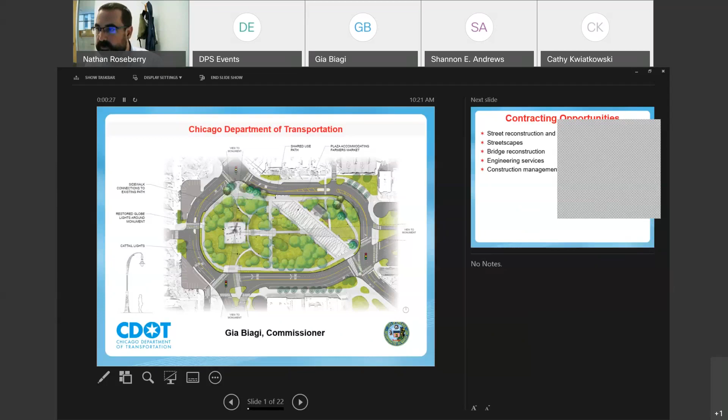Nathan, I'm personally impressed, so you're good to go. We are, this is our first virtual experience, and so we are more than welcome because we know you've got some good stuff to talk about.

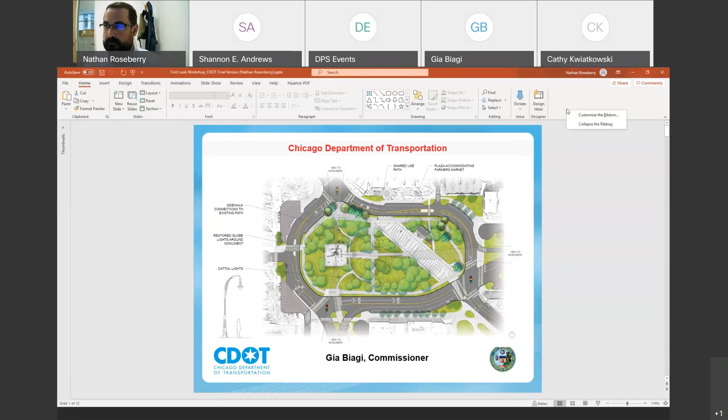Okay, great. Well, thank you all very much for having me here today and for your patience as we got up and going. As the commissioner mentioned, we have a lot of great work coming up in the near term, and you're going to see even more work coming in the coming years with our initiatives to really focus in on those state of good repair improvements, but also making sure we're thinking about all modes of travel, people who bike, walk, take transit, and drive, thinking about safety and supporting the local economy.

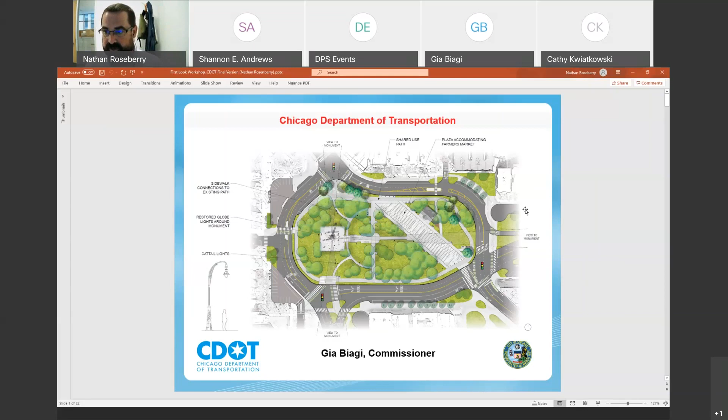I have this slide on the front to really highlight that. This is the improvements we're looking at on Milwaukee Avenue, focusing on the Logan Square improvements, where we're actually looking to reconfigure the intersection. We were going to rebuild it, but we didn't want to rebuild it exactly the same way. We saw opportunities to improve connectivity and activate the space, providing more space for people to enjoy while making sure they have opportunities to get around.

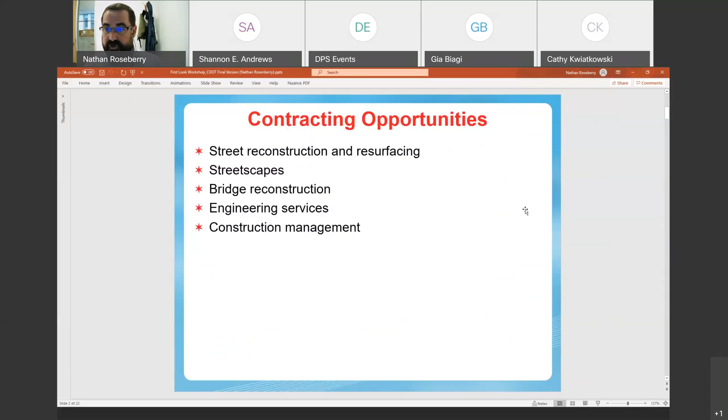So today I'm going to walk you through contracting opportunities by different categories. We'll walk through street reconstruction and resurfacing projects first. Next, we'll walk into those streetscapes the commissioner mentioned, looking to revitalize different corridors. We'll go into bridge reconstruction and rehabilitation, and then we'll finish off with engineering services and construction management opportunities, really the professional service end of the opportunities.

So the first category is street reconstruction and resurfacing. The first project I wanted to highlight: CDOT is supporting a lot of the improvements you'll see in Jackson Park for the Obama Presidential Center. I'm happy to report we have finalized the federal review and will be moving into construction later this year. We anticipate bidding the project second quarter and starting construction in third quarter for our first bid set, which will include the roadways on Lakeshore Drive from Hayes to 57th, Hayes Drive from Stony Island to Lakeshore, Stony Island from 64th to 59th, and a small section of Midway Plaisance from Stony Island to Cornell.

These improvements will include widening roadways, reconfiguring roadways, new landscaping, new pedestrian underpasses - three of them - widening existing bridges, and a lot of traffic signal work. We'll be modernizing or installing new signals; I think there'll be three new traffic signals with this contract.

And these improvements will allow for more and better connected park space in Jackson Park, really trying to make sure we're providing that recreational opportunity and allowing for the construction of the Obama Presidential Center that'll be running in parallel.

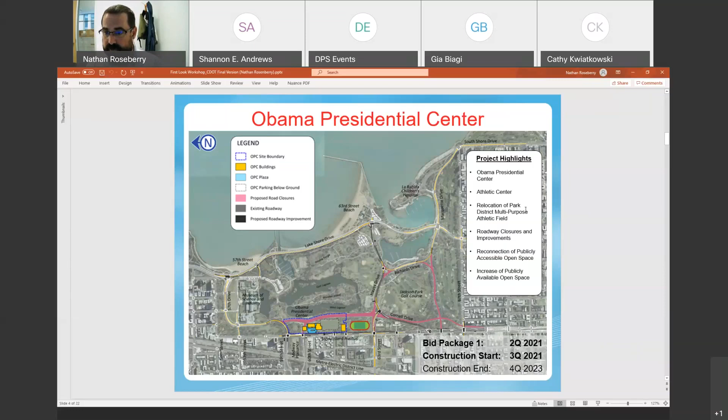Next project I wanted to highlight is our arterial resurfacing contracts. We anticipate releasing our 2021 Fed-funded series of arterial resurfacing projects. This will be 4 different contracts.

They are geographically based. There's a north, a central, a south, and a far south contract. Totals of 41.15 miles, about 10 miles per contract.

With this work, you'll see it's predominantly asphalt based, so it's milling and resurfacing the roadways. We do make sure to make everything ADA compliant, so you'll see concrete work, especially at the corners.

And you'll also see those complete streets and safety improvements. So you'll see modifications including curb extensions, refuge islands, bike lanes, and new pavement markings.

We anticipate this being bid in second quarter, with construction starting in third quarter, and really looking to focus to try to finalize construction this year.

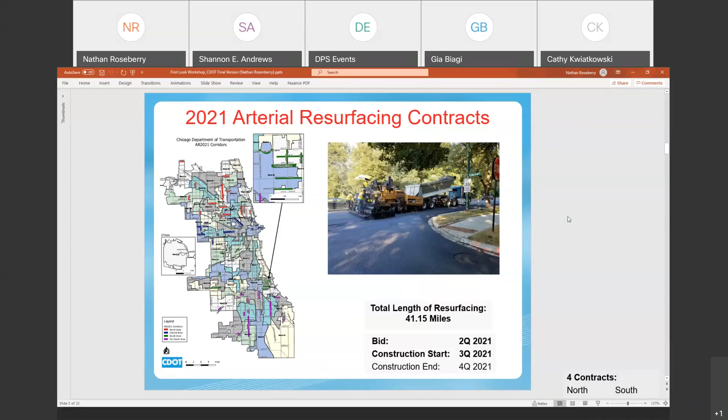The next project was the one I showed on the first page, the Milwaukee Avenue project. This is Milwaukee Avenue, Logan to Belmont.

It's a full right-of-way project, so we will be rebuilding the entire right-of-way, sidewalk, roadways, and the like.

It's the 5th section. We've been working our way south from northwest to southeast on Milwaukee. Most recent reconstruction was Addison to Belmont, so this will pick up there and move southeast from Belmont down to Logan.

So it will include sidewalk work, curb and gutter, roadway resurfacing and reconstruction, street lighting, landscaping, traffic signal modernizations, and new traffic signals. It'll also include a lot of plaza work.

So we'll be focusing in on the 2 plazas internal to the Logan Square intersection and the Kedzie Plaza to improve those areas and activate those spaces.

This one does include federal and local funds. We anticipate bidding it third quarter this year, starting construction by the end of the year, and construction lasting approximately 2 construction seasons.

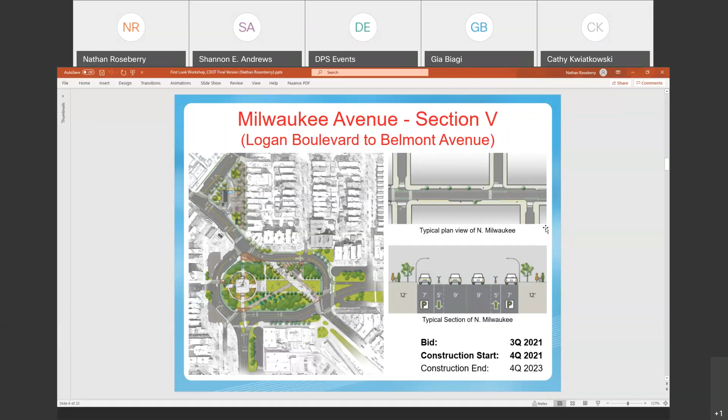The next section is Lake, Ashland to Halsted. This is another roadway reconstruction project. We are looking to lower Lake Street from Ashland to Ogden.

We've been working on Lake Street west of here, lowering the roadway to improve that vertical clearance for the larger vehicles that need to get through. That last stretch at Ashland and Ogden will provide access to larger vehicles to get to the interstates via Ashland or Ogden.

While we're doing that, though, we're also looking at all modes, and there'll be a focus on the pedestrian realm. So really that sidewalk space, providing a consistent design throughout, street lighting and furniture and design in that sidewalk space, really looking at their safety and comfort.

So you'll see curb extensions and widened sidewalks and the like. There's also a proposal for bike accommodation.

There's existing bike facilities to the west, and so extending those further east to get to the bike corridor on Halsted.

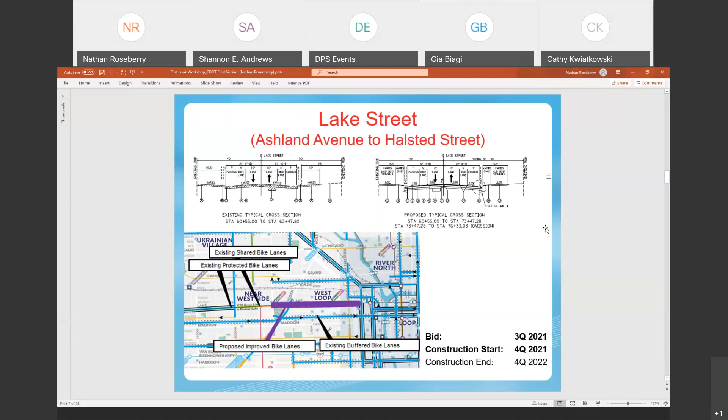This is a locally funded project, so we utilize TIF funds. We anticipate bidding at third quarter 2021, construction starting fourth quarter 2021, with construction wrapping up fourth quarter 2022. So about a year's worth of construction.

The next reconstruction project is Grand Avenue, Damen to Ogden. We just bid the project to the west of here, Chicago to Damen, so that construction will be starting this year. So this is continuing our roadway improvements on Grand, moving from west to east.

This will be a locally funded construction project. It'll be right-of-way to right-of-way.

So we'll be rebuilding the sidewalk, curb and gutter, and the roadway, installing new lighting, new trees, modernizing 3 traffic signals, and then looking at pedestrian level safety improvements at intersections, so curb extensions and raised crosswalks.

We anticipate this project being bid third quarter, starting construction by the end of the year, and taking approximately 1 construction season to complete.

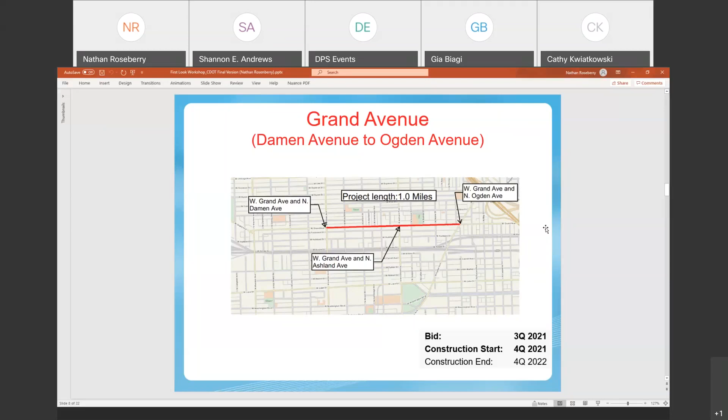The next group of projects are streetscape projects. First project is 71st Street. This is the second section of the project. It's a continuation of previous work in the area on Jeffrey.

This will be improvements between the right-of-way and building face that were previously completed. Those improvements included new lighting, new sidewalk, curb and gutter, light pole, community identifier signs, site furnishing, pavers, and trees. This second phase will be focused more on the roadway.

So there will be full width roadway resurfacing and pavement markings. It'll include new bike lanes along 71st, creating a bike connection between Jeffrey and the Lakefront Trail. There'll also be pedestrian crossing improvements at Metra tracks, enhanced crosswalks and ADA ramps.

There'll be a travel lane reduction to reduce speeds and crashes, taking it down to a consistent cross-section of a single lane. And then architectural fencing across the Metra tracks, really to help improve safety with those interactions with the trains.

This is a very unique street where we have at-grade trains in the center of the roadway.

This includes federal and local funds. We anticipate bidding this project second quarter, construction starting third quarter, and wrapping up second quarter next year. So a little less than a year to complete.

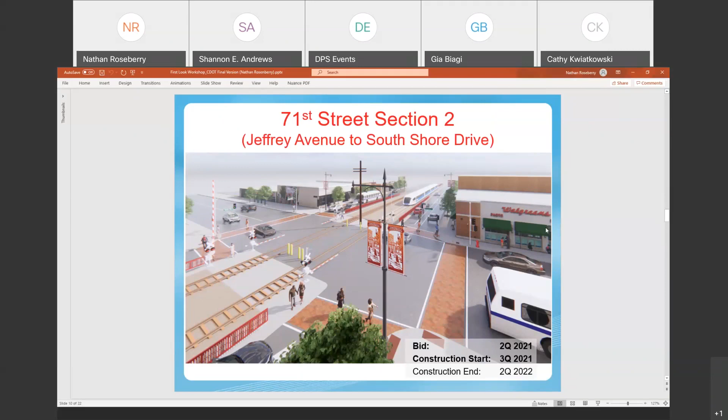The next streetscape project is really focusing on a singular intersection: Lincoln, Ashland, and Belmont. This project also includes a couple side streets as well. It's on Lincoln from Wellington to Melrose, on Ashland from Barry to School, and Belmont approximately 100 feet west of Ashland to Southport.

There'll be sidewalk extensions at 3 key intersections along Lincoln, plaza space expanded and unified with this project, intersection reconfiguration, and bike lanes along Lincoln. The project also includes sidewalk vault reconstruction, new sidewalks, bump outs, curb and gutter, ADA ramps and crosswalks, improved drainage focused at the intersection, traffic signal work, modernization, other traffic improvements, new street and pedestrian lighting, light pole identifiers, trees, landscaping, and sidewalk furnishing.

This project includes federal and local funding. We anticipate bidding this project second quarter this year, starting construction third quarter, and lasting through the end of 2022.

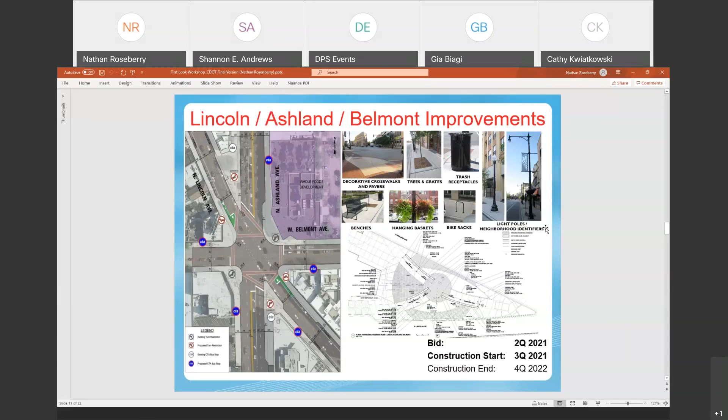The next project is Lawrence Avenue, the second section of the streetscape project, from Western to the Chicago River. The project includes new, wider sidewalks, curb and gutter, bump outs, ADA ramps, crosswalks, pedestrian refuge islands, bike lane improvements on Lawrence and Francisco, full width resurfacing, new street and pedestrian lighting, parkway paver treatments, site furnishings, tree planting and landscaping, and community identifiers.

We anticipate bidding this project second quarter 2021, with construction starting third quarter and lasting through the end of 2022.

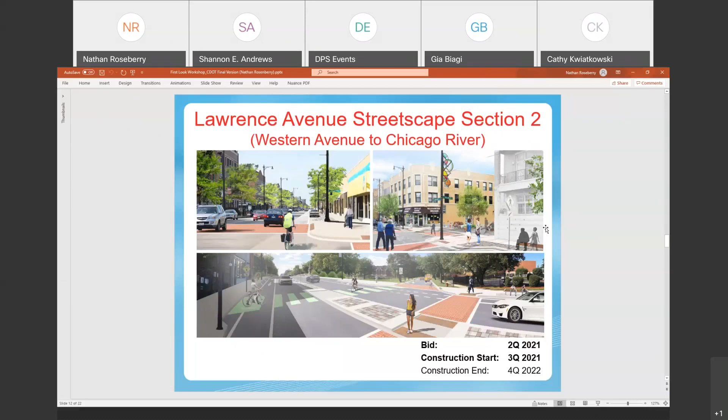The next streetscape project is along Pulaski from Rosemont to Devon. This project includes new sidewalks, curb and gutter, ADA ramps and crosswalks, full width resurfacing, new piggyback acorn lighting added to the existing lighting out there, parkway improvements, tree planting, and a raised crosswalk at the Rosemont intersection. We anticipate bidding this project second quarter 2021, with construction starting third quarter and lasting through third quarter 2022.

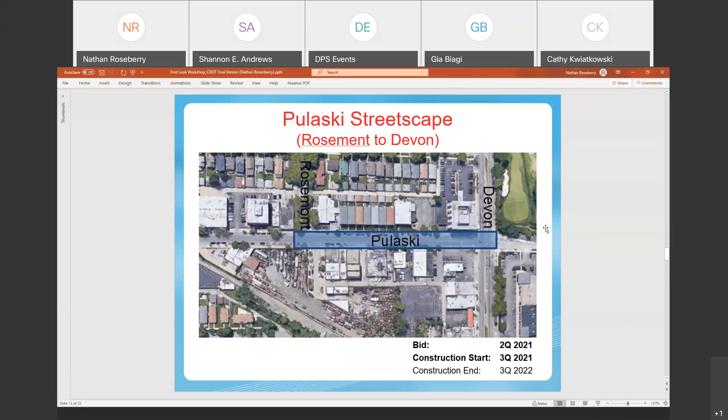The last project is on Fullerton from Narragansett to Lockwood. The project scope includes pedestrian safety and infrastructure improvements, including full width resurfacing and patching, curb extensions and refuge islands along the corridor, new street lighting, sidewalk, curb and gutter, ADA ramps and crosswalks, and tree planting. We anticipate bidding this project second quarter 2021, with construction starting third quarter and lasting through the end of next year.

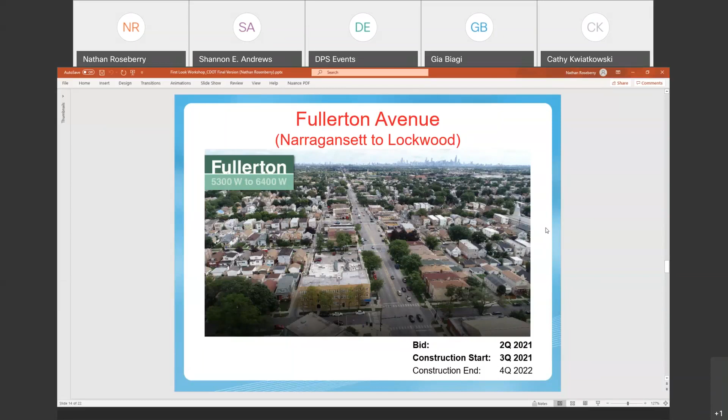The next section is on bridge reconstruction projects. The first project I wanted to highlight is the Harrison Street Viaduct, on Harrison Street between Canal and the Chicago River. The structure was originally built in 1921 and is a 22-span structure with an approximate length of 775 feet and an overall deck width of approximately 65 feet.

The structure is located between Canal and the Chicago River and spans the Union Station Railroad tracks and the post office yard. The work will include reconstructing the existing viaduct, including reconstruction of the deck, piers, drainage systems, lighting, and lower level pavement, while reusing existing foundations. We anticipate this project bidding next quarter, with construction starting third quarter and lasting through the first quarter of 2023.

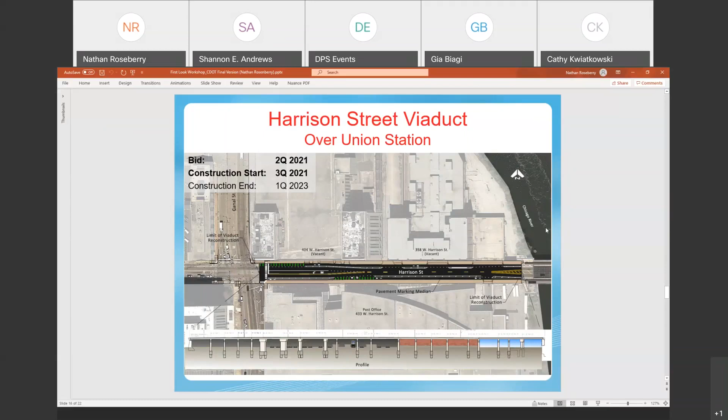The next project is the 31st Bridge over the Metra CN Railroad, located in historic Burnham Park. It was originally built in 1926. Both the superstructure and substructure will be replaced due to the deteriorated condition. Deck width will be increased and the architectural facade will be replicated. New sidewalk lighting and drainage will be installed to current standards. We anticipate this project being bid next quarter, with construction starting third quarter and lasting through the end of 2022.

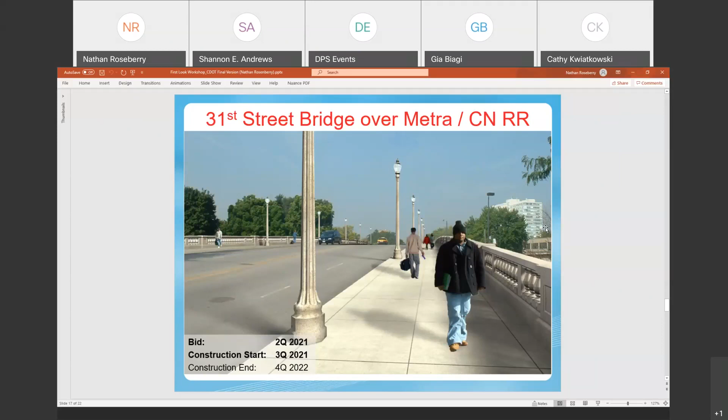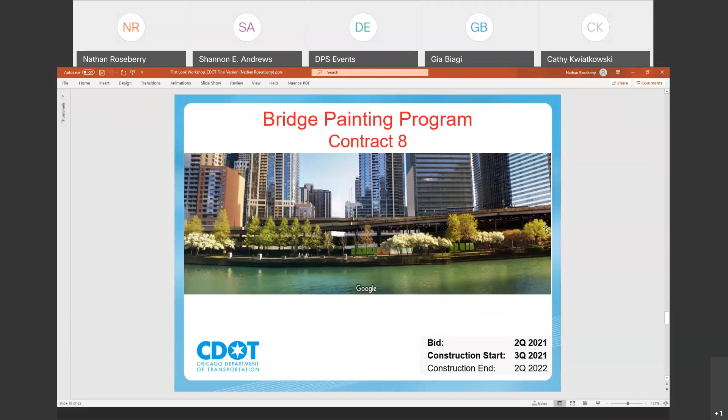The next project to highlight is the Bridge Painting Program, contract number 8 of that series. The scope consists of sandblasting, cleaning, and painting structures. Sandblasting removes built-up rust and existing lead-based paint from the steel. A 3-coat system is then applied to protect it from further corrosion, and this project will be focused on East Wacker Drive. We anticipate bidding this project next quarter, with construction starting third quarter 2021 and lasting through second quarter 2022.

Next project is the Cicero Avenue Bascule Bridge repairs. This structure is a double-leaf, multi-trunnion type bascule bridge. The bridge is approximately 304 feet long with a roadway width of approximately 76 feet and an out-to-out deck width of approximately 100 feet. Movable leaves of the bridge are not operable. This bridge was originally constructed in 1927.

The repairs here are really focused on the center break and grating. These are temporary repairs in advance of a future capital project at this location. We anticipate this occurring in staged construction, so no full closures, lasting about 3 months. We anticipate bidding this project third quarter, with construction starting in fourth quarter and wrapping up till first quarter 2022.

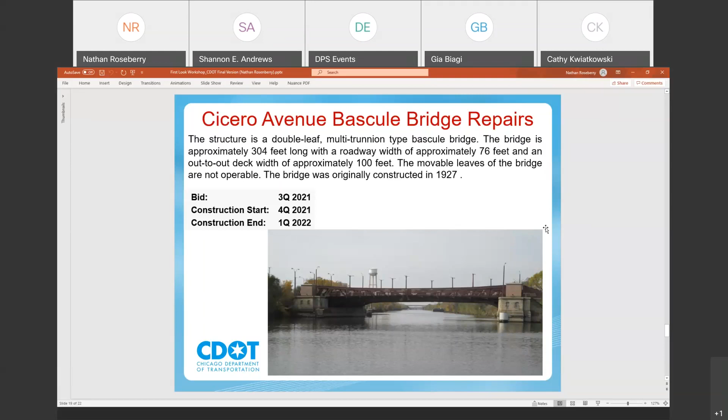Next project is the Cermak Road 47th to Kilbourn Viaduct vertical clearance improvement. This is a project where we're looking to actually lower the road under the existing viaduct. There's an existing rail viaduct here that restricts access to the industrial uses east of the viaduct, and those trucks really are aiming to get to Cicero to get to the interstates. We've also seen a pattern of, unfortunately, pretty bad crashes at this location as well.

So there'll be a focus on safety improvements. The project will include lowering the roadway and with that reconstructing basically right-of-way to right-of-way with new sidewalk, new roadway, new drainage, as well as installing those safety improvements at the edges of the piers. We do not anticipate reconstruction of the bridge itself, but there would be some minor work just to make sure we shore up around the bridge for the reconstruction.

We anticipate this project does include federal and state funds. We anticipate bidding at third quarter 2021, with construction starting fourth quarter and lasting approximately 1 year.

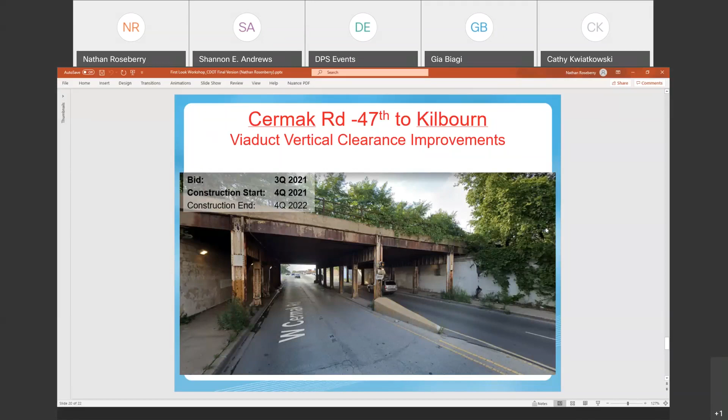The last project I wanted to highlight in the structural series is the Canal Street Viaduct. CDOT has been working on a series of projects across Canal. The first section would be Adams to Jackson. This would be replacement of the existing viaduct that's out there and reconfiguration to match the existing operations that have been put in as part of the transit improvements and access improvements around Union Station. We anticipate bidding this project third quarter, with construction starting fourth quarter and lasting through third quarter 2022.

And you'll see in the future a series of projects along this Canal Street corridor with subsequent sections both north and south occurring in the next 4 years.

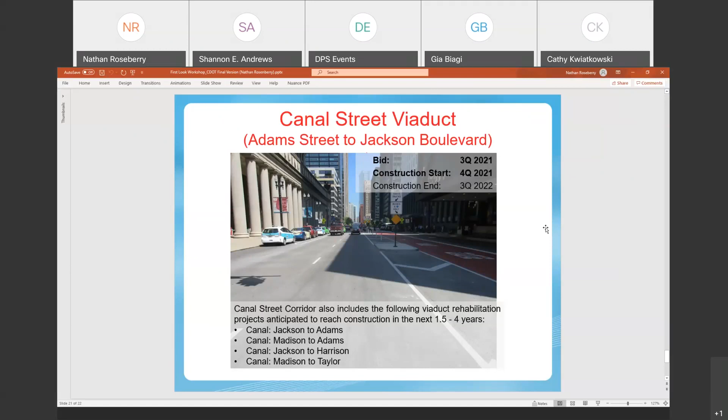I did want to wrap up with professional services as well. To get these projects designed and constructed, we obviously need assistance from consultant firms to implement them. You'll see here we have a variety of upcoming professional service opportunities, both for construction management, like on the Grand Avenue project from Damen to Ogden, to complement the reconstruction work I talked about earlier, as well as phase 1 designs like the ones on 106th and 95th Bascule bridges, and phase 1, phase 2 on Washington Street and Jackson Boulevard Bascule bridges.

We are also looking to release a new master consultant agreement for the engineering division. This would cover both the highway section, which I work in, and the structural section. I anticipate that coming out hopefully in second quarter this year. We'll also be releasing inspection, maintenance, and repair services for the Chicago Tunnel systems second quarter this year.

We'll be focusing in on design contracts for the Boulevard system. We're looking to develop both a framework plan and also design services for implementing improvements along the Boulevard network. I anticipate seeing that second quarter this year. There should also be another master task order for complete streets. This is out of our project development division as well, second quarter.

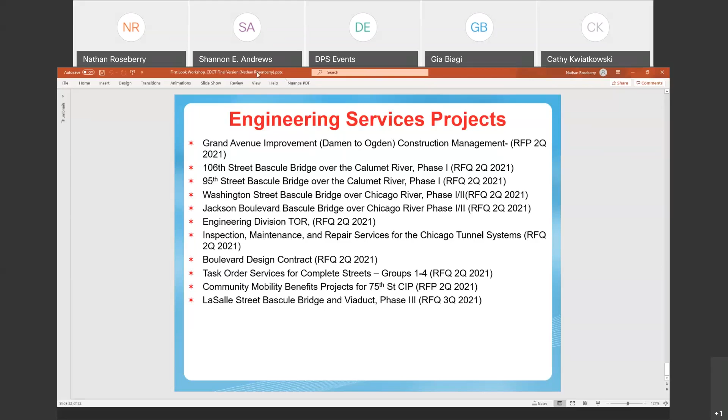With that, I'm happy to answer questions.